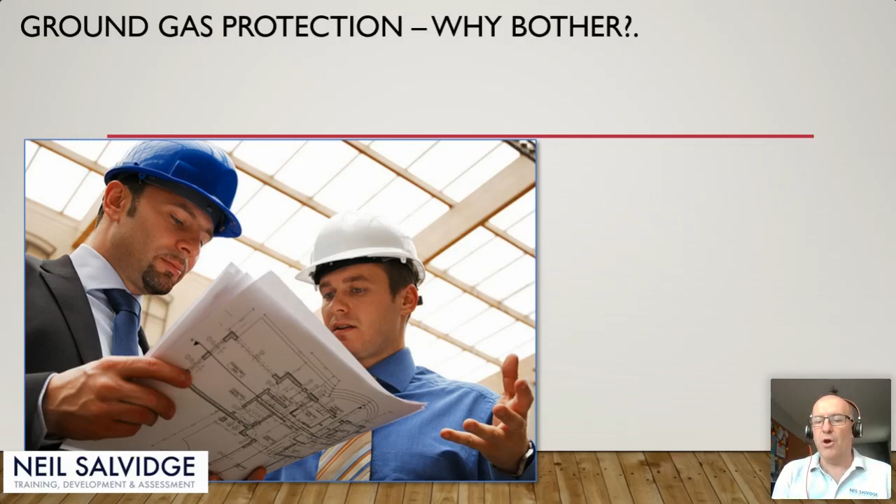And often you find the construction team you're dealing with on site, and as a technician I would meet these people, it's kind of been passed on that they've got to make it fit into the program and they've got to fit into the costs. So we tend to find ourselves meeting QSs, site managers, who are very kind of, oh, what's the problem? They're thinking about the money. They're thinking about the timings.

How long is it going to take me? And often, unfortunately, it gets passed on to other trades. I've put here brickies, sorry, bricklayers, but we do find that they're putting DPMs in the ground, and it nicely fits into the time frame when they're on site that they can deliver that part of the package.

And often it's done with very little diligence about the ground gas element. So they will be looking at it and going, oh, well, we can put that in, not a problem. We just chuck it in as we would a DPM, not understanding the full consequences of whether that DPM that is a gas protection system works or not.

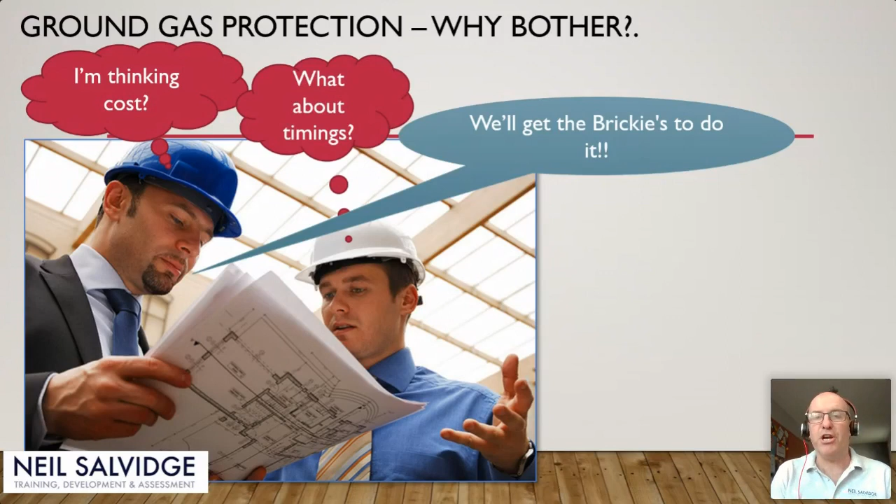So they're quite critical things that I find happen on site, and even to this day, as I say, I'm still answering that question when I meet people on site, and it's a little bit worrying still. So sharing that knowledge, please. There's a lot of information out there. We need to get it to people.

So if we look at the very early history, gases, ground gases, well, they're everywhere. When our Earth evolved 4.5 billion years ago, roughly, I wasn't around, but the scientists knew it was from various gases and explosions and all the science. I'm not a scientist, but we are surrounded by gas today. Nitrogen, oxygen, a big component of our atmosphere.

And when we're working away, we naturally take these for granted. But these gases also accumulate, and they are generated from within the Earth. So ground gases do develop with certain concentrations in oxygen. You'll find that increased oxygen or decreased oxygen can have an adverse effect on us as humans. We are very reliant on having roughly about 20-21% oxygen in our atmosphere.

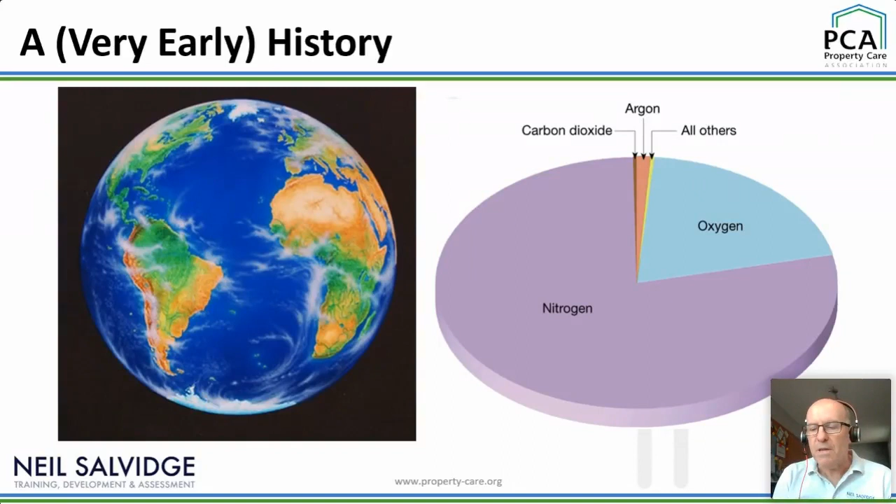Without that, we lose our ability to work effectively, or if it increases, we can enrich flammability. We all know producing a fire needs oxygen. So that's one hazard that we do encounter. As you can see, carbon dioxide's in there as well. It's generated naturally from the processes in the ground, from anaerobic or composting, digestion of soils, leaf matter, etc. So that's been going on a long time.

We can't stop it. So more recently, the history we knew about, and I often get asked this on site, don't you guys turn up with a canary to check what the air quality is doing? Well, no, but thanks to our forefathers who did go down the mines, because this is where a lot of this early development occurred. They used to take a canary, and they knew when the ground gases reached a certain level and they were harmful, the poor old canary would suffer.

How they discovered this, I don't know. It's like who ate the first egg, you know. But they knew that taking the canary, fortunately that's evolved, and it went on to things like having a Davy lamp to detect those different ground gases. And it's the oxidization of the coal that they were digging out that would generate these various hazardous environments for them. So there'd be methane generation down there.

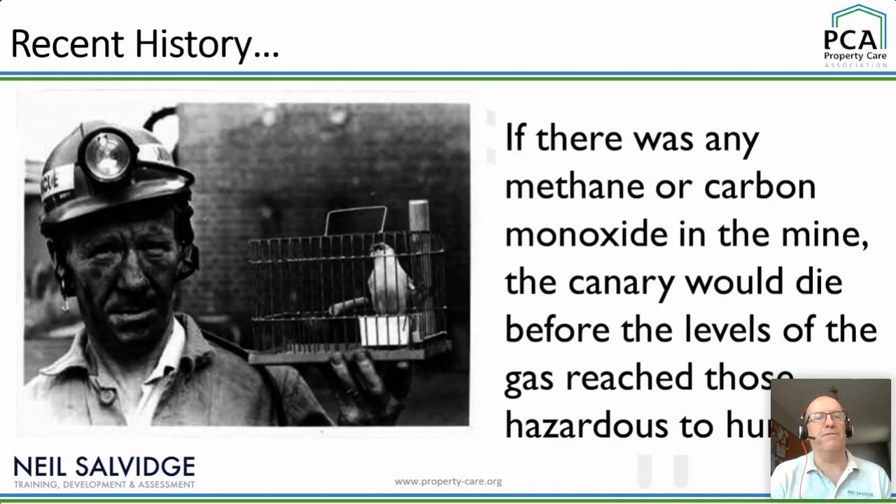If you speak to any miners, and there was a colleague assessor who was involved in the mining sector who told me some real horror stories of things that had happened with ground gases and explosions. So a lot was learned from our ancestors on this side of things. So that's a little bit of recent history.

Some of you might be familiar with the Abbeystead incident that happened in 1984. It's noted in our industry as one of the earliest significant events. Sadly, 16 people were killed in this incident at a pumping station built by the local water authority to divert floodwaters from one valley to the other side. And while they were constructing the tunnel, they went through a strata where there was natural gas occurring. It was a coal seam, shale gas that they were drilling through.

All working well when there was water. Nobody was down there. It wasn't really an occupied building. It was just a pumping plant facility. But then they took local residents on a tour, and unfortunately they drained the tunnel, and during that, gas had migrated into the void that was left by the water.

So during the course of the visit, something ignited the gases that built up in there, and they believe it was a methane explosion. Back in those days, people used to smoke in a lot of unusual places. I've heard one rumor that it was potentially somebody lighting a cigarette. So really not a very nice situation.

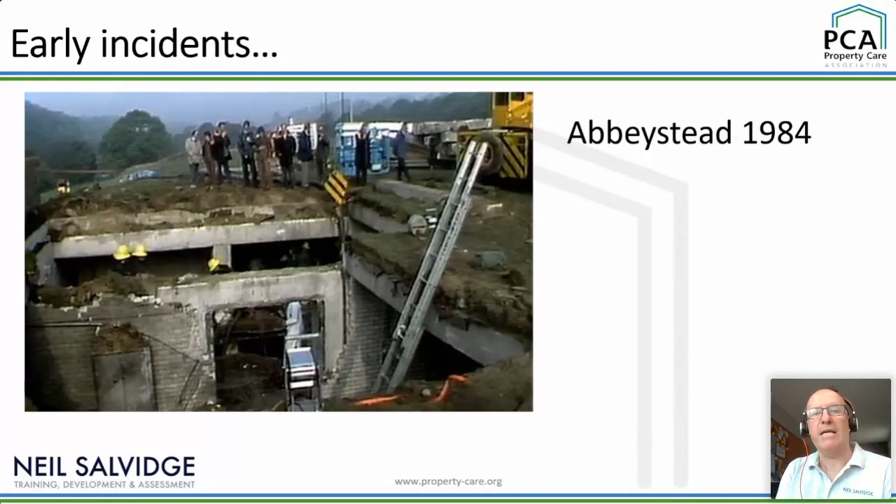And it certainly set a mark in our history of ground gas. 2 years later, Loscoe in Derbyshire was another significant event. Slightly different in this format, in that it was migrating ground gas from a neighbouring landfill site that permeated through the strata and got into this property. This is Clarke Avenue. And at 6 o'clock in the morning, there was a source of ignition that allowed that ground gas that had accumulated in the property to cause the destruction that you can see on the screen now.

This, again, 2 years apart from the earlier Abbeystead incident. So people really did start picking their ears up here and thinking, we need to look at this. The first investigations were really carried out on this, and there was some good guidance and initial findings from CIRIA documents that were worked on following these incidents. So again, fortunately in this incident, only 3 people were injured, no fatalities in this one, but it certainly made people have a look and think.

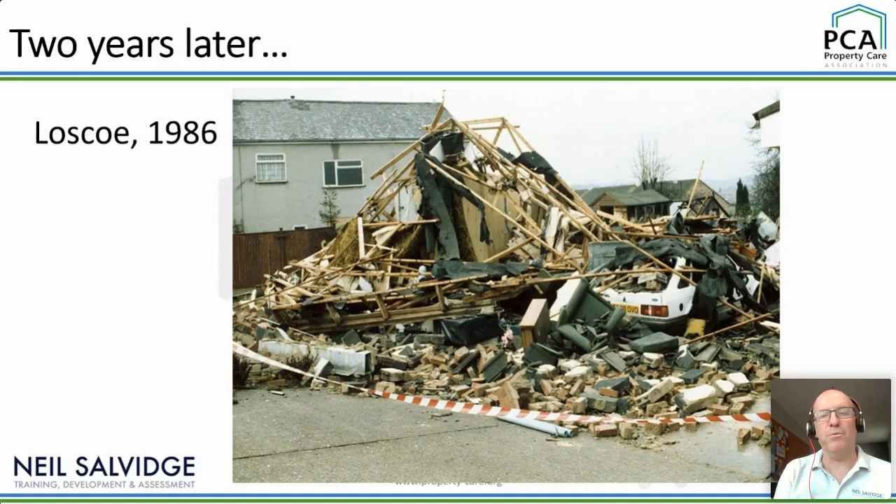So that started our early forms of guidance. The BRE, Building Research Establishment, put their first reports together, and BRE 212. These would be familiar documents to those already working in the industry, but these were the founding documents that set the scene. The government then also took a lead on this element as well, and Approved Document C, which sits in our building regulations, was first published in 1991. Again, still in existence today. There's been numerous revisions and amendments. 2012, I believe, was the most recent.

This side of the industry is where our site investigation, our planners, all the people at that front end are really looking at this stuff. But it's very valuable just to know that they exist, because document C, some of you will be familiar with other approved documents, A, B, C, D, E, F, and so on. Ventilation, document F is quite a key one that a lot of people work on as well in this sector. Just a little point of fact, it mentions Japanese knotweed, and I know the PCA have a knotweed involvement, but Approved Document C has it as a contaminant in the ground. So this is really investigating those contaminants in the ground, so that you're aware of what you're dealing with before you proceed into your planning phase and progress the building.

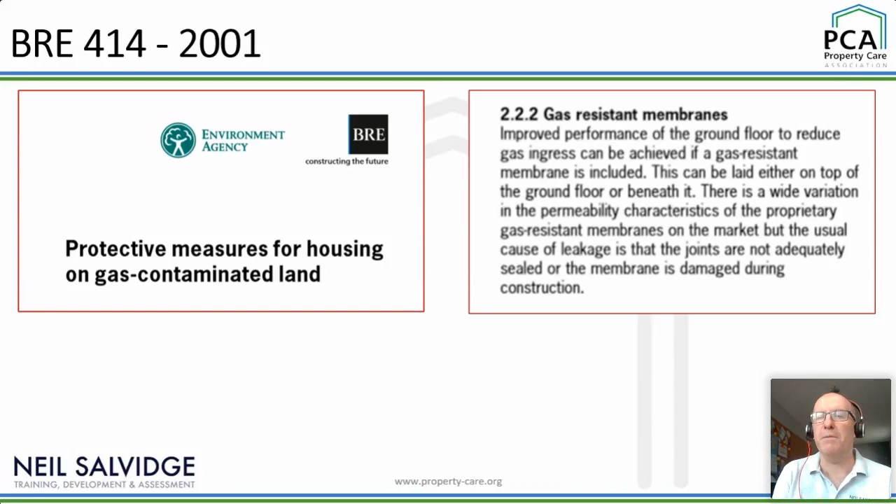A document that I refer to occasionally is the BRE 414 document, 2001. It gives the first kind of comments on using gas-resistant membranes. And you can see in there, comment 2.2.2, the gas-resistant membranes are mentioned, and they're used throughout this document. For those that look at it, it's kind of useful. A little bit dated now, to be honest, and it could do with a bit of a tweak, because a lot of the building methods there are very flat.

Hopefully you'll be able to see my cursor. Is the cursor coming up on this, Andy? Can you see it? Is that holding up? Yes, I can see your cursor.

Good. So when the BRE wrote this initial document, everything is on a very flat plane. Every drawing shows the membrane flat all the time. And some of you that are familiar with putting in gas membranes will often find that there's a step detail or a formation at the perimeter to make up that upstand. None of the drawings in here really detail that.

The other thing that is mentioned is the slab with a geocomposite drainage blanket. That is a little bit of a worry, because it's a very similar product to those used in drainage systems in our structural waterproofing, on the cavity drainage systems. But if it's incorrectly installed or put in the wrong way round, it's not effective in ventilation for gas protection. And that's a common occurrence that we do see in this sector, where the membranes or the composite venting layers are not installed correctly. So it needs a little bit of a tweak and an update, I think, but it's still current. That document is still used to this day. So BRE 414.

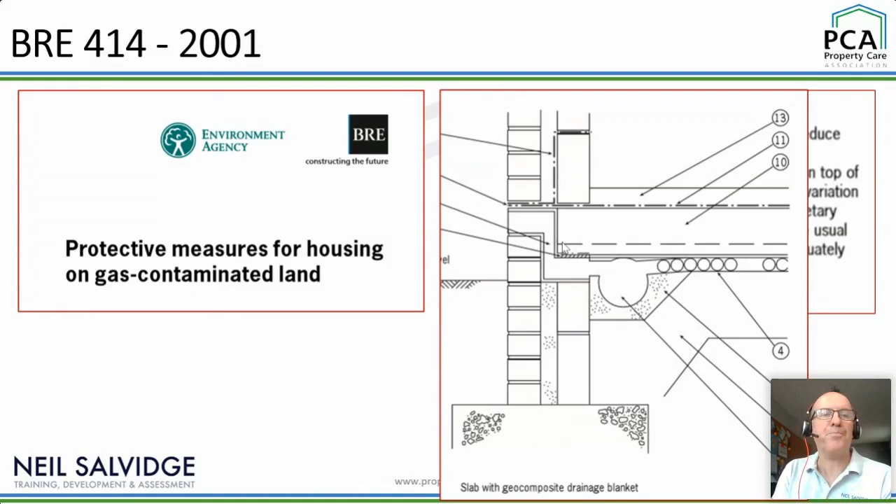When I'm dealing with my NVQ learners and doing support with those, remember, I don't train them on how to do it, but we look at the different elements of ground gas protection. One of their requirements is to understand the differences. So I say here, are all the gases the same? Well, no, they're very different. They all move, behave, they're built differently.

So looking at the methane, water, well, water a gas? You know, you can find it in different states. You can get it in a vapor, in a solid, and in a liquid state. So when you boil water, it becomes vapor. It's in a gas, yeah? But also understanding if it's toxic, if it's an asphyxiant, if it generates an explosive atmosphere.

So that one, a lot of my learners will say, surely that should be like a blast and an explosion. Well, that's an explosive, you know, the explosive product, like a bomb or something. But generating explosive atmospheres is something that's quite serious in this sector, being aware of it. And this is a rather unusual one at the end, which is the VOCs, having awareness of volatile organic compounds.

I listened in on James's webinar a couple of weeks ago now, where they were talking about the evolution of damp proofing and the DPCs, and it was mentioned in that with the VOCs, and I will touch on that a little bit later on with some of the membrane products about how effective they are against VOCs.

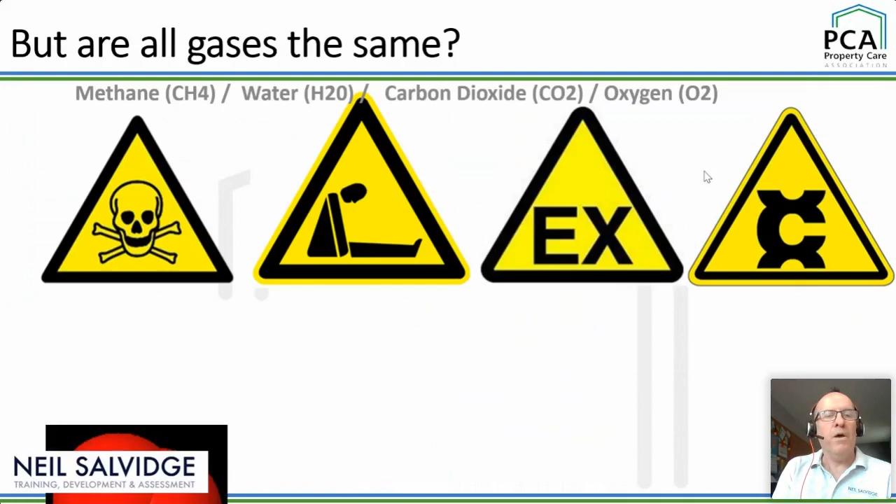So we also look at the structure. Again, I'm not a scientist, but if you look at the way they're built, the way they're formed, we can see there, the very small one we've put in there is methane, very small molecule. And often when you talk to people that are putting a barrier, gas protection in, they say, well, if it keeps water out, it's going to keep the gas out. Well, no, that's not true, because the structure of a methane molecule is far, far smaller than a molecule of water, and it will get through.

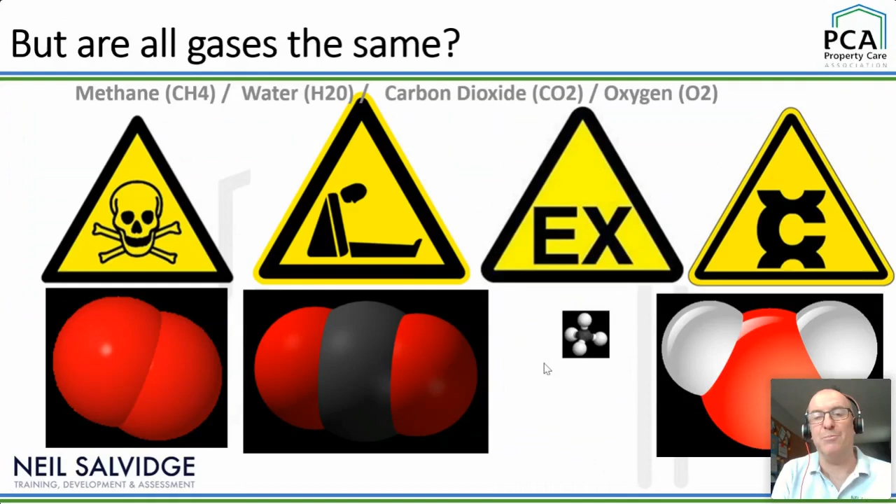They behave very differently. Gases have a different route to get into buildings. They don't work whether you can pressurize them, but normally they will flow in various formats. They're driven by pressure in the atmosphere. They're driven by water in the ground, or a flooding or tidal influence. So all these things have quite a major part to play in how they work or how they affect the building.

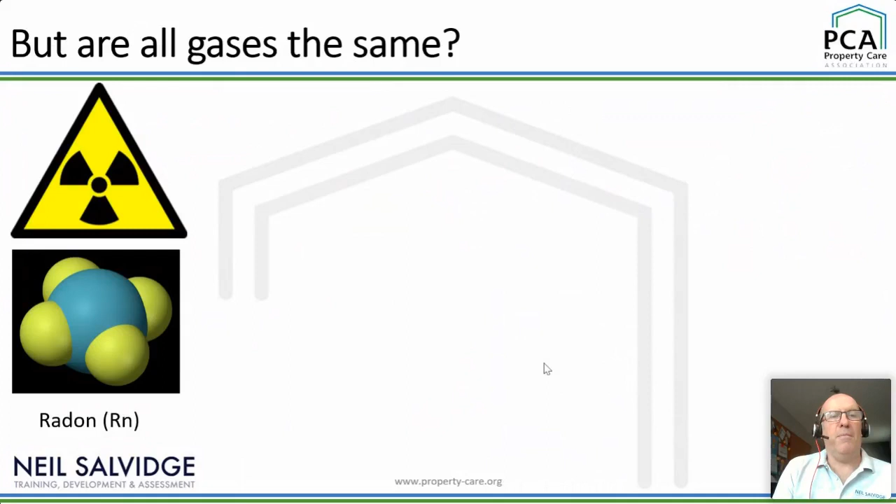And then we have the uninvited guest at the table, which is always the radon side of things. A lot of people will talk about radon. I've been to some of the most unusual places where you'd expect to find radon. And I'm going to put up a radon map of England here. And I've been working up in Norfolk, and they're putting gas barriers in for obviously other reasons, not looking at the site investigation, and then telling me, oh, we're putting a radon barrier in. Everything becomes a generic radon barrier.

Whereas if you speak to people down in Cornwall, the southwest, where you can see the darker tiles here, that indicates that there's higher or more noted concentrations or affected properties with radon there. So the radon map is available for the UK. And Andy, not to leave our friends north of the border out, there's one for Scotland as well. We can see there the Granite City, Aberdeen, and we can see radon is very associated with the fractured granites in the ground, and that's permeating through the strata.

And often it's very difficult, well, you can't really detect it in borehole sampling, for example, but often it's knowing that it's present in the environment where you're working, and that you will be able to design systems in and incorporate that so that should the radon be there, you can do something about it rather than have to take extreme measures later on when it's too late.

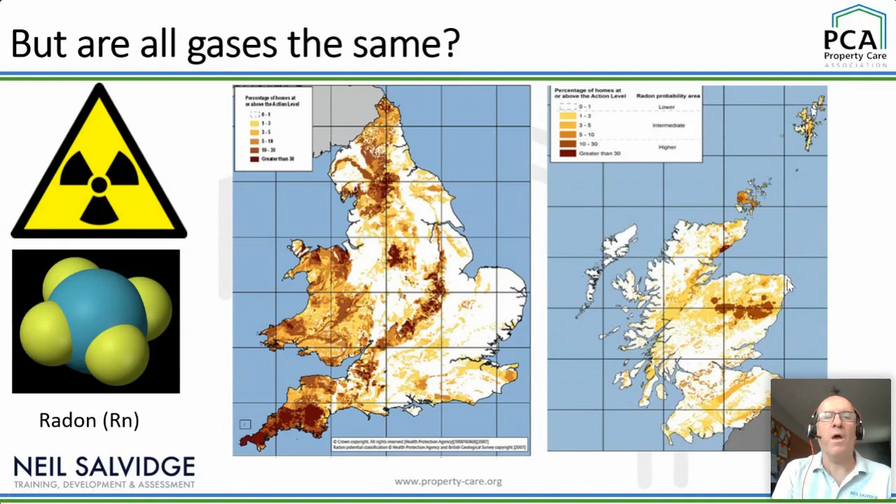Yeah, so just got what we call a conceptual site model here. Looking at this is a requirement under British Standard 8485 when you're designing your systems, that you consider the three elements that we've got there. We've got the source in the blue, pathways in the red, and receptors in the green. So the source, we've got waste, and we've got peaty soils down in the bottom by the stream. Pathways is your geology, and then we have the receptors, which is the actual buildings here.

You know, that's all the people. We've got various receptors, people outside, even the vegetation, that's a potential receptor. So hopefully when people are doing the site investigation, your consultants will be looking at some forms of remediation strategies where they might adopt cut-off barriers to try and segregate the contaminants. They might look at soil remediation methods where they dig and dump, or they dig and inject, or they aerate the soils. These are all various methods that are used. Or they might use a capping layer.

Now, the capping layer was used at Loscoe, and that was one of the driving mechanisms which came off the back of conceptual site models that caused the ground gases to migrate the way they did, plus the atmospheric pressure was a driving force as well. So the weather outside, there was a particularly low pressure weather event that caused the gases to change the way they traveled. So in that instance, they are remediation strategies that might be used.

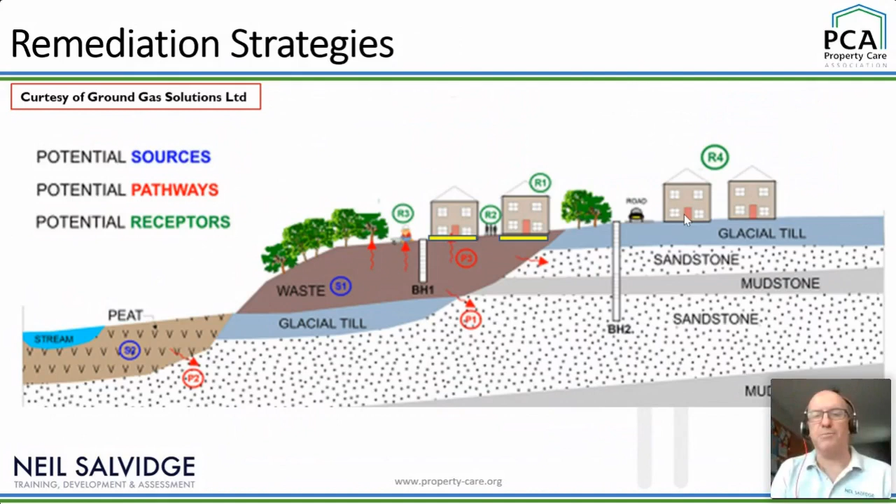But often what we find is some of them aren't adopted, and they just go straight in with a membrane to the building. And I've seen it on numerous occasions where the membranes have gone in, and you'll find that two plots, as we can see here, have got gas membranes, and maybe 20 meters up the road, they've not got membranes. It's quite common where people zone the sites into various risk factors. So that's all something that I see on a regular basis, especially on these big multi-housing developments, big estates being built.

So, but then we get the situation where old meets new. And in this particular instance, I come across a lot of what we call retrofit buildings where the old property's been there hundreds of years, never been monitored for ground gas. Whether it's got it or not is another thing. But often they were designed and built with good ventilation in the underfloor voids, good air bricks, mainly for the timber floors. But that's a good method of, if there was any contaminants, they get diluted and then pushed out through the airflow.

And you'll find that the homeowner will then want to build their new house or their new extension, like we can see here, this very snazzy looking annex to the property. And suddenly they've got to jump through all the hoops for ground gas protection. They've got to put membranes in. They've got to do this, this, and this. Yet the rest of the house hasn't got anything on it. So this could also change the dynamic by putting a building next to an existing building where you're putting all belt and braces gas protection in, but next door has got nothing. So it could increase the potential hazard to that property.

Yeah. CIRIA are currently writing and working on a document relating to retrofit measures in these scenarios. British Standard 8485 is for new builds, doesn't really cover existing structures, but some planners will adopt 8485 on a new build on an existing structure. So it's interpretation from the local authority, how they deal with it and how the designer works with it.

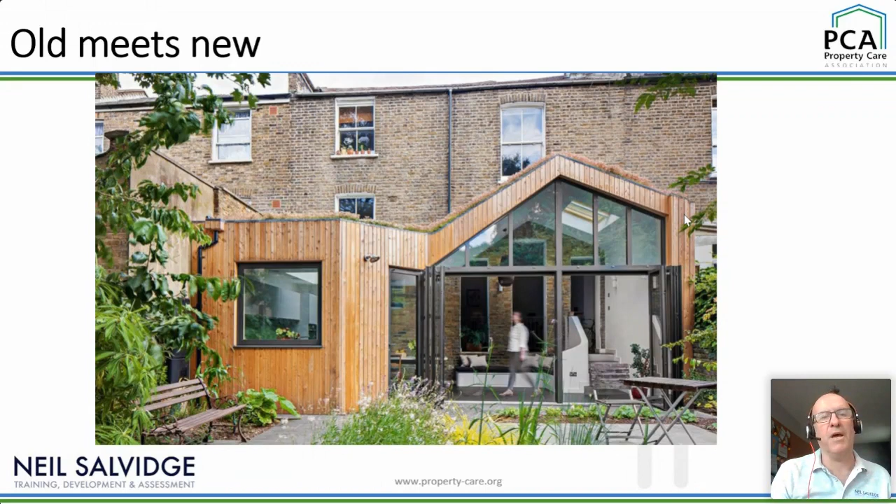Okay. So, Andy, this is where I'm going to ask for your help now, mate. The poll. No worries. Well, do you want to throw out the question then to everyone?

Well, I'm going to look at some of the installation standards now, and we have an NVQ in existence. There isn't an SVQ for Scotland. Everybody operates under the NVQ. So NVQ or not to NVQ? That is the question. Do you think we should be following the NVQ process for our installers to be qualified? Or do you think it doesn't really matter?

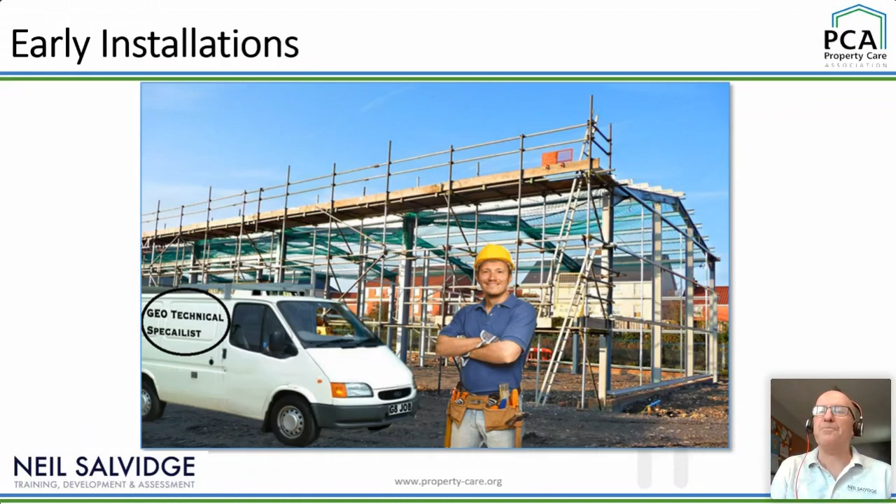So let's again look at the early stage of installation of gas membranes, and this is where I started out. Back in the mid-90s, it was particularly a guy in a white van, trade background of some description, who would often offer to put the gas membranes in. It was unregulated back then, so anybody put it in, and there were various standards. We know that there were some very good and some very poor. So hopefully over the next couple of slides, we'll look at some of those various standards that existed.

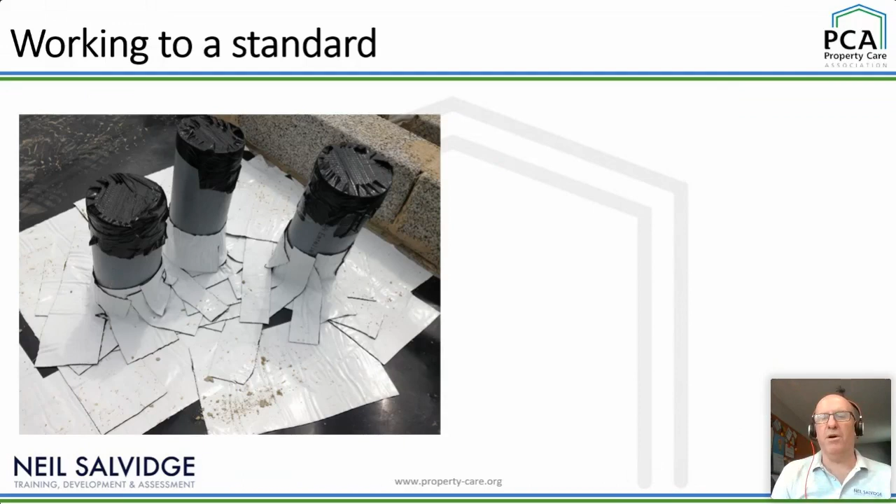Those that have been on presentations with me would have seen this picture before. Looks like we've got some self-adhesive here catapulted on from about 20 miles away. Working to a standard is critical in this industry. If I said to the technician that had done that, can you go and repeat that again and again and again? They'd never be able to do it. So having a standard method of work is quite a key thing.

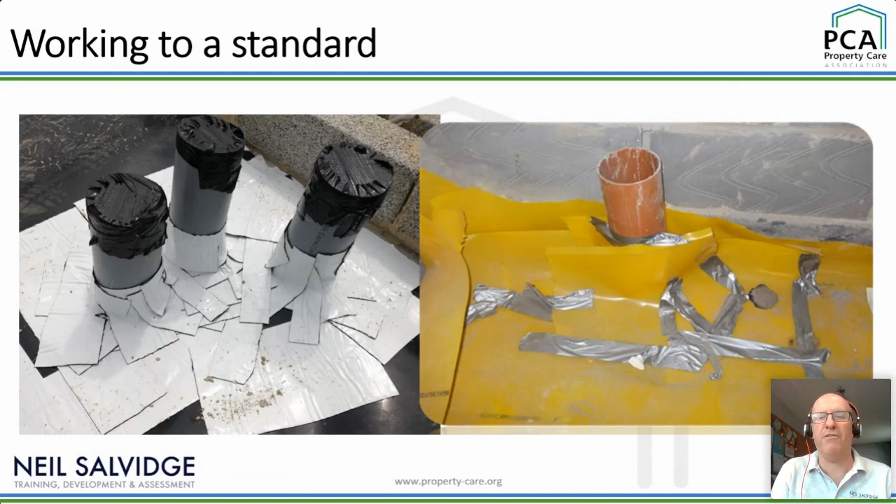Also, when you give the product, and I'm not going to name any occupations here, this was obviously given to somebody, a roll of self-adhesive tape or a variant, it looks like duct tape to me, but that was the effort, and that is a genuine picture. That was taken by a verifier looking at a job, who was expected to sign that off. So the technician had no knowledge of what was required, what the expectations were. So having that in advance is a real leap forward.

So in the development of our NVQ process, a little history of it, in 2008, 2009 it was developed, and we launched the NVQ in 2010. So a couple of years with the industry putting it together. And if you've got insomnia one night, please visit the National Occupational Standards website, where you can view VR 612 and 613, and you will see the standards required. Those in the waterproofing sector would have been familiar with VR 762, 492, and 491. Very, very similar to the gas protection in their scope.

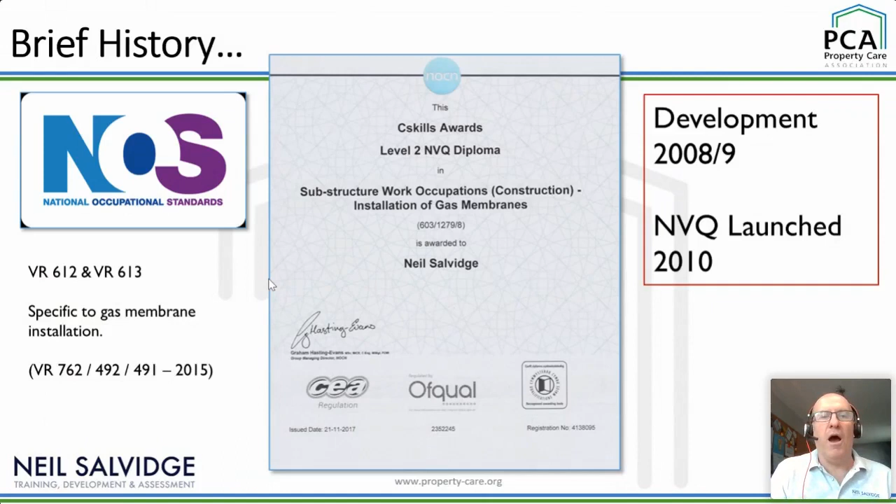So they're the learning outcomes that we expect the learners to be able to achieve on a consistent basis to prove their competencies. And ultimately, at the end of the day, you're going to get a nice certificate for doing that. But that also evolved into the good old CSCS cards to demonstrate those competencies. Here we can see that the green general construction site operative card is commonly used.

And do site managers really check these out? No. I think they just want to tick the box, so they've got something in their health and safety folder to see that you've done a health and safety and environment test. That's it. Not competencies to your specific trade. I hear of more coming through now where people are denied access to site because they don't have a blue card. So demonstrating you're a skilled worker, which is your NVQ2, is becoming more prominent now. People are asking for that NVQ level 2 qualification. You can see a copy of it.

And one good thing that we're seeing as well is the NVQ3, which isn't gas membrane installation, but it's supervisory, because some people are reading the CIRIA guidance where it says NVQ2 for gas membranes is a supervisory role. Well, no, it's not. NVQ2 is not a supervisory role. NVQ3 is a supervisory role. So people are stepping up to the plate now to do their level 3 as well in supervising those particular works, which is all good.

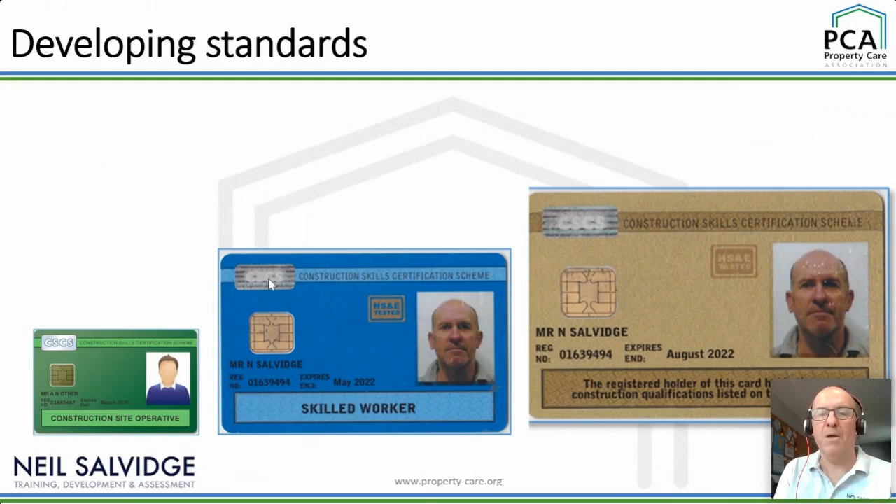And again, the chip system on the card, how many cards have you had read in your history? That blue card you're looking at there has been read twice in its entire lifetime. Not very good.

There's national training standards that are put together by CITB in this sector as well, to look at those, to consider that, because that is going to set you up so that when you do go for your driving test, the assessor isn't going to keep throwing things back at you and saying, well, you need to go back and revise and consider this again. And I'm very active in that. So hopefully, there's support out there. So using it before going into this.

I actually had a screeder ring me up yesterday, tell me he was on a job. He needs it validated. He needs his NVQs by Friday. Ain't going to happen. Sorry. One disappointed person there.

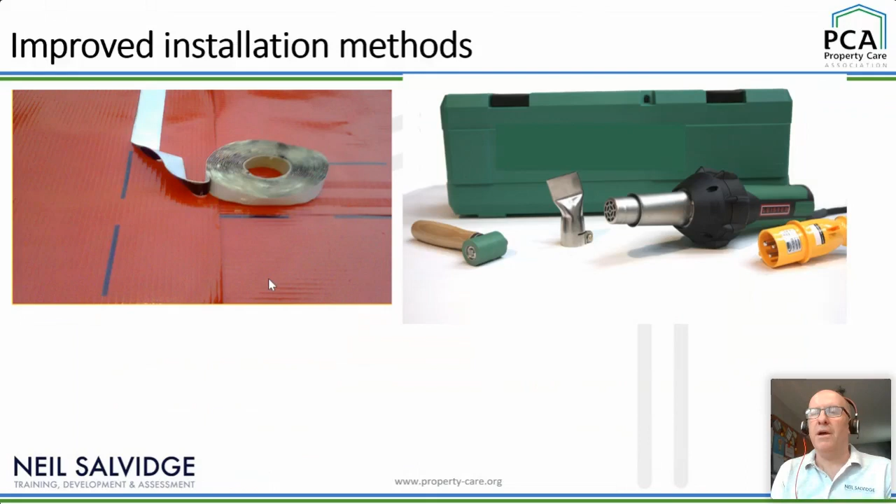So these are learning criteria that we expect as assessors, that they should be able to demonstrate that and talk us through it and give us a good insight into their operational methods. And we also look at the more industrial welding processes, so using machine welding as well. It's quite a key part of giving somebody a massive warehouse of 10,000 square meters of installation to do. To sit on their hands and knees with a hand welder is going to be quite time consuming and also not very good for the health and well-being of that technician.

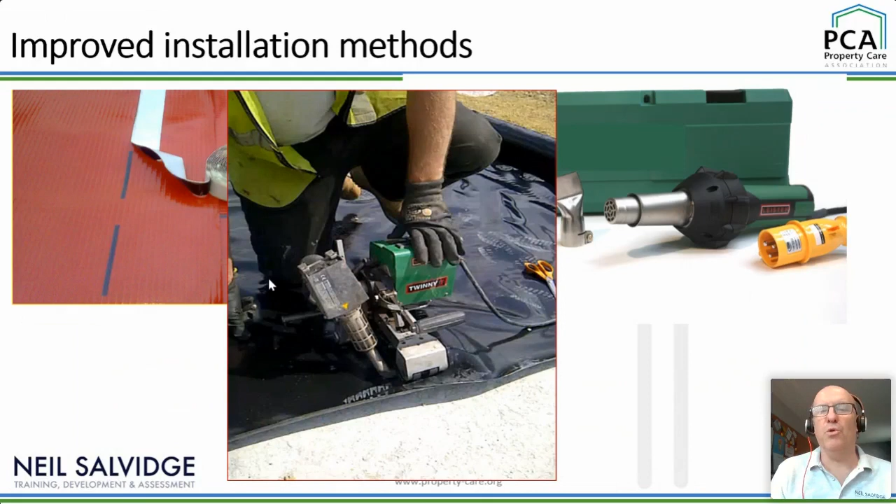But understanding, again, welding methods that are out there and can be applied, it's one of the performance criteria we expect. And again, in some of the VOC environments, welding is the only recognized method of dealing with that, where tapes are still in dispute whether they are acceptable or not. So again, speaking to your manufacturers on that side of things is quite a key element, and they will guide you on what products they can do.

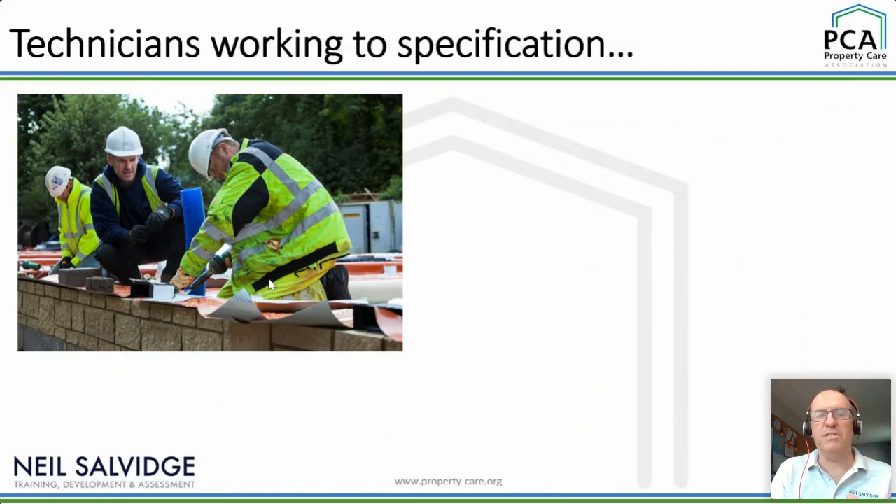So again, technicians, it's nice to get together with them, talk through working with drawings, working to a detail. They must understand that. And also understanding all the technicalities of different things they're going to encounter. For example, here we've got some steel stanchions with a base plate, a few pipe ducts, and we've got pipe entries and an acoustic robust detail. So sometimes I mention this in my pre-applications to learners. Have you ever done acoustic robust detail? No, never heard of that.

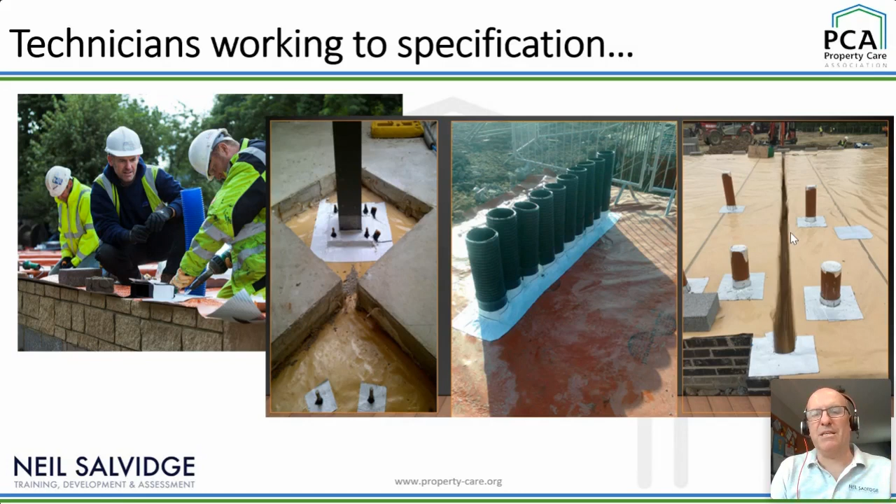Okay. We need to find out what these details are, because when you encounter them on site, and we haven't got a vast number of details, they should be able to look at it, understand, and know how they're going to approach doing that detailing. In this particular example, the technician that did this actually did it in a reverse preformed system out of the hole and then located it in. So seeing good working methods is really good, to see how a technician will adapt their skills to overcome that.

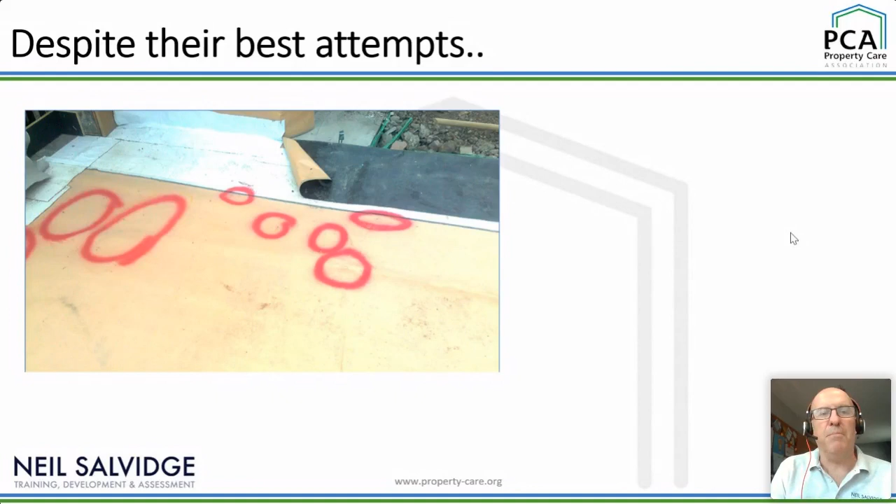But despite their best attempts, our good old follow-on trade is our worst enemy out there. They give us many problems, and as you can see here, somebody's identified some puncture damage in the membranes. Unfortunately, they've actually done more damage by marking it with a solvent spray marker on the membrane. That's quite detrimental and causing more problems. And to really rub salt in the wounds, you let your steel fixers come on afterwards and basically saw through the ends of their sheets and straight through the membrane as well.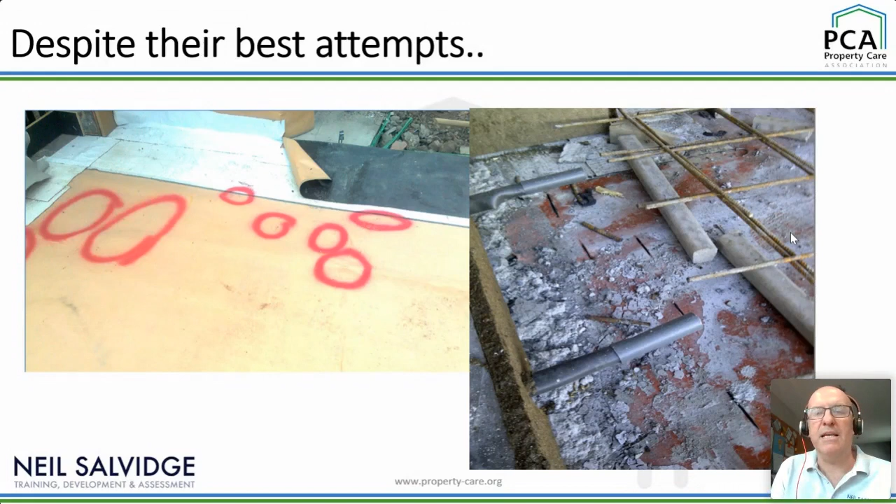It's an ongoing battle, and I'm sure a lot of you are sitting there going, yes, I've seen that, and it's education that has to go on out there. That job cost a lot of time and money to put right in the end. There was nearly 400 linear meters of damage like that, which actually took 3 days to repair and nearly £4,500 in cost, plus a delayed concrete pour. So QSs don't like that. And then if you see situations like this, it's game over really.

Driving on reinforcing on the membrane, that's really, you know, I see pictures come up on LinkedIn of all these snazzy installation jobs, but then I look at it thinking, how are you going to get the concrete over there? You can see that a concrete wagon's going to be driving straight over a membrane. Whoever validated that, well, I don't know how they validated it, but no thought went into the sequence, the process, and how to get that membrane safely in and fit for purpose.

They'd be best off actually leaving it out. Yeah, it would have saved money anyway.

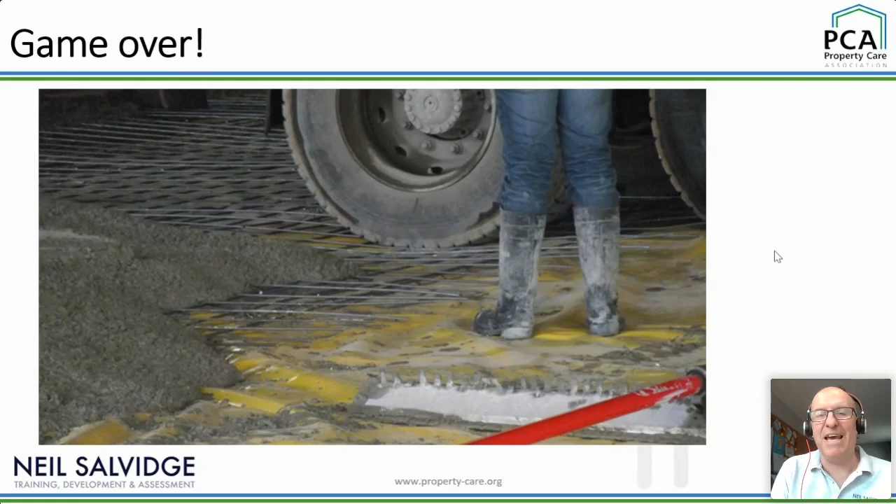Yeah. So the other thing is, people look at the designs of the gas protection systems, and here we can see this is a traditional bit of containment/landfill lining, where they're using very heavy gauge HDPE membranes. So these could be 1.5, 2 mil thick, very rigid, hard to turn membranes. Great in the environment that you can see there, but the minute you try and put them in houses, and I have encountered this where people are trying to lift a 2-ton roll into a house or cut it down into sections and form corners, it's just not achievable. The membranes aren't appropriate.

So I've put a little chart there with turning. HDPE membranes are notorious for stress fracturing when you turn them over a certain angle. A lot of the turns that we use in gas protection are 90 degrees. That would basically put a crack all the way through that membrane at that junction. Yeah.

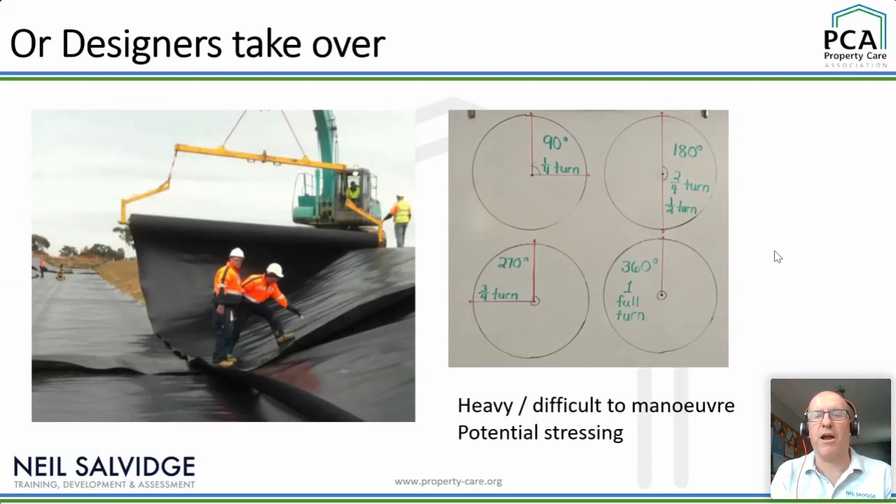And the other one was looking at the VOCs, having appropriate membranes that can survive VOC impact. Predominantly it's the vapors of the VOCs that are the element we face. You can get VOCs in a liquid phase as well, but predominantly ground might be detected as having a VOC contaminant in it. Certainly in the retrofit environment with oil spills, it commonly happens where membranes are put in as a last measure to protect the property from any residual vapors there. But also new builds might have a site investigation report that's detected that VOCs are present in the ground.

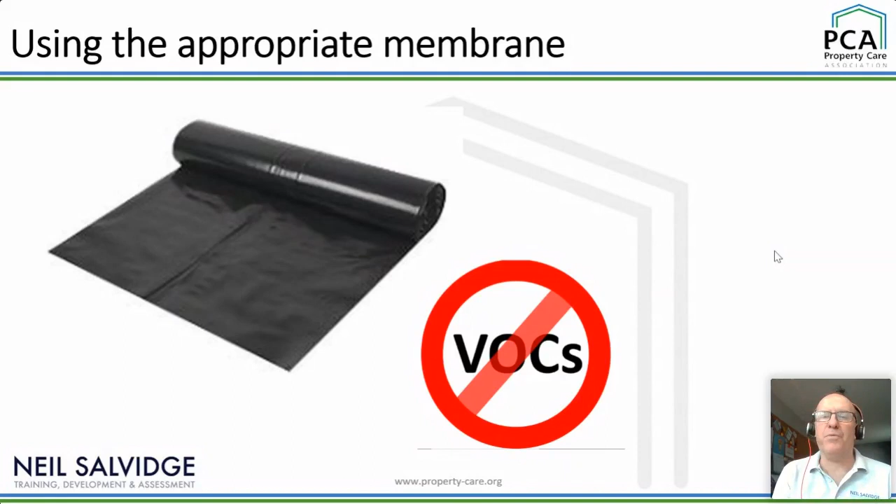So again, CIRIA wrote some guidance on that, C748, which is the guidance on VOC membranes with VOC vapors. So that is an element to really research and look at if you're going into that environment where your site investigation has identified VOCs, volatile organic compounds, in the ground. And like with our damp proofing that James mentioned in his previous seminar, it could be a consideration there that crosses over into that sector as well.

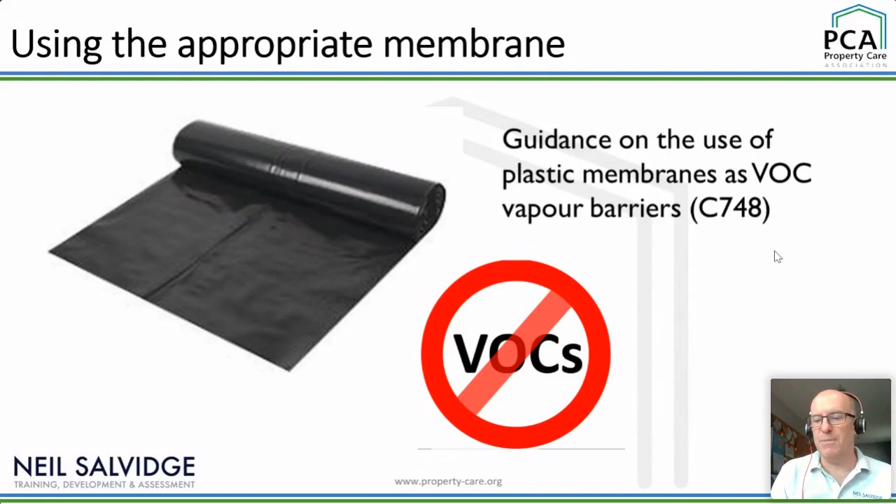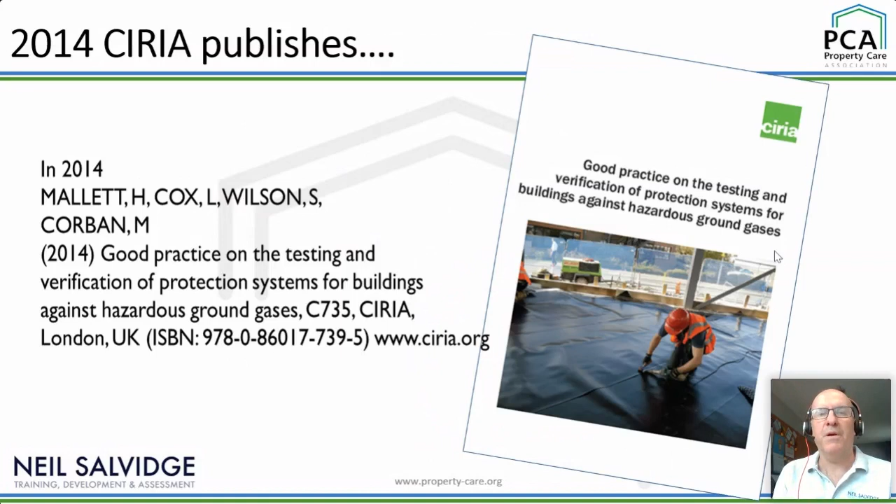So 2014, this was a real game changer when C735 was published. I have to give credit there to the authors who wrote that guidance, and it's still active today. It's a popular document. It works hand in hand with other documents that are out there. So C735 is your verification document. And that ultimately closes this circle: we investigate the site, we risk assess the site, design it, install it, and verify it. So the top box here is our verification, which should shut the circle.

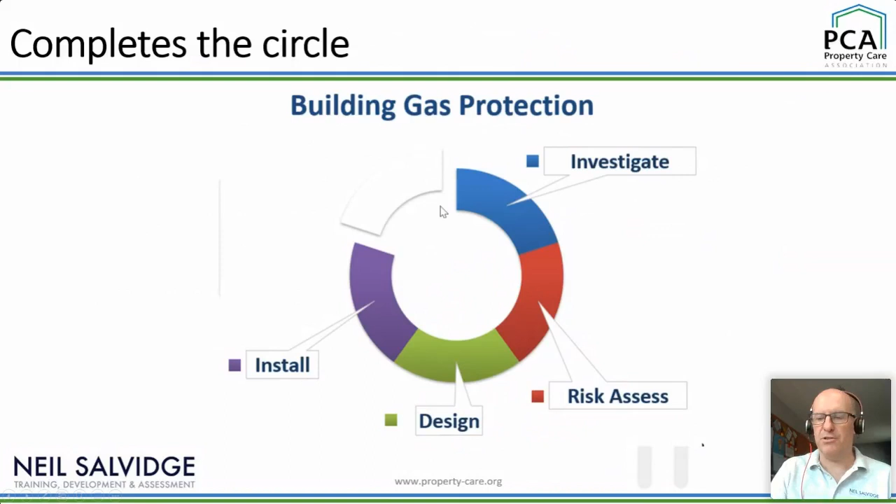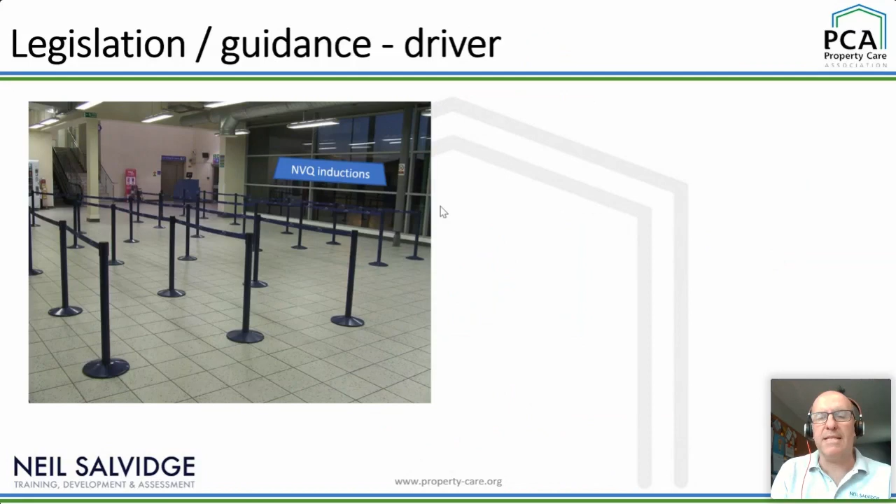So that guidance document from CIRIA actually changed the tide. In 2014, my queue for NVQ inductions was like this. And I think most airports in the UK are like that at the moment as well. But there was nobody waiting. You didn't need to do it. We don't need the NVQ, it doesn't matter. When that guidance landed in 2014, I suddenly had a queue going around the corner. Now, it wasn't quite as severe as that, but there was a lot of people.

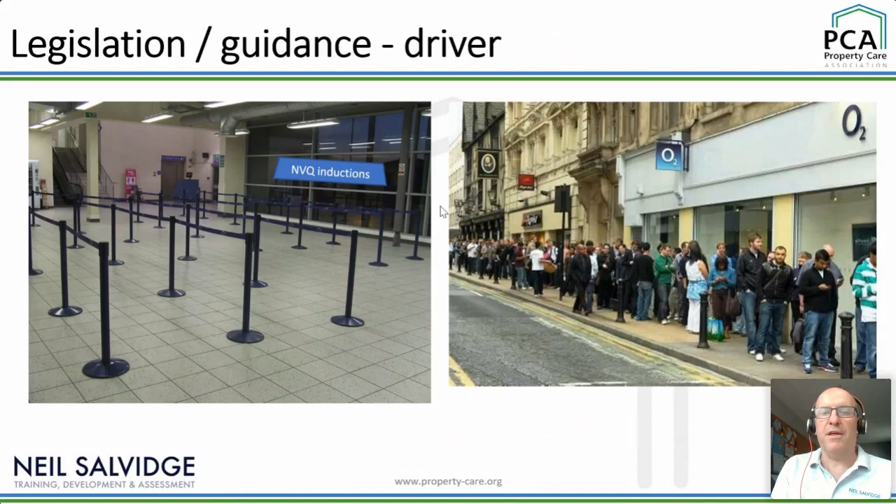Suddenly my phone was ringing. I need to get an NVQ. I've been doing this for years. We're good technicians. Excellent. But doing the NVQ, we need to do that process. So that was a real changing thing that happened. It forced the hand of our industry. So when we go back to the NVQ question, 83% of you say yes, we do need the NVQ. 6 say no. Okay, well, that is valid.

Because the next slide I take you on to is that when CIRIA wrote 735, the group put together, and I've heard a brilliant term for this, the green target zone as the donut of doom, where people make the consideration on the risk. So it's a risk-based approach to the gas regime we can see here, the complexity of the design. So that's back to the turning, the verticals, horizontals, all those little funny details, acoustic robust details, for example. Then we look at the installation workforce, and it clearly states we've got 2 competencies there, non-specialist and skilled.

So with those, there was a dividing line of skilled and non-skilled. Now, some of the lower risk jobs might actually be very suitable for a non-skilled workforce if it's a very simple design, low risk site, but you might have a workforce whose skills will adapt and they will be able to do the work. Whereas you might have a high risk site in the red zone, very complicated design. You don't want to be putting that into the hands of the non-skilled.

And again, this falls into place where VOCs are present, verifiers will call in 100% verification in those environments. You really need to consider if you're not going to be able to pass a verification plan by putting a ground worker on a high risk site with a complex design. It's just not going to happen, and your verifier will call the shots on this. So with British Standard 8485, there were some changes in the recent revision last year, but table 7 still nominates 2 points for a validated membrane. So that sits on that table 7 for you.

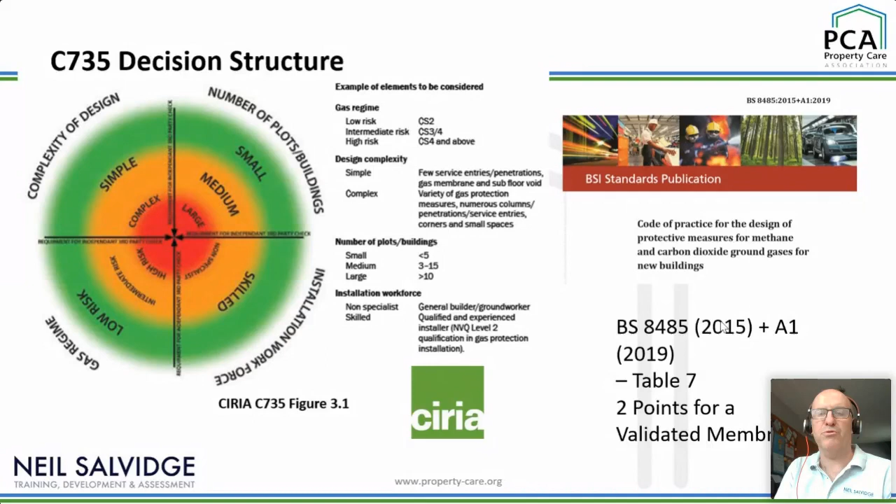I put the picture up of Gorebridge. I think we all know what happened there. Well, that was the way Gorebridge was. 2014, this incident. Carbon dioxide asphyxiated a group of youngsters, caused a problem. You can see the property there at the front that's been boarded up. A couple of years later, it's all gone. The local authorities made the decision to demolish the whole site. 64 houses were demolished there. I've heard numerous stories that people were killed in there. Well, as far as I'm aware, there were no fatalities in that particular instance. People were hospitalized, but no fatalities.

But when you look at that circle of the gas protection, the NHS Lothian report clearly identifies that the problems came around in this early investigate and risk assess stage, because no gas protection was designed in here, so therefore there was no installation. And when the houses were built, verification didn't exist. 735 hadn't been written at that point. So these two were kind of off the hook. But certainly that is now playing out, that people are looking at that element of ground gas protection. So that forces us back to the early phases of ground gas protection design, and sets the scene of what we've got to achieve on the installation side.

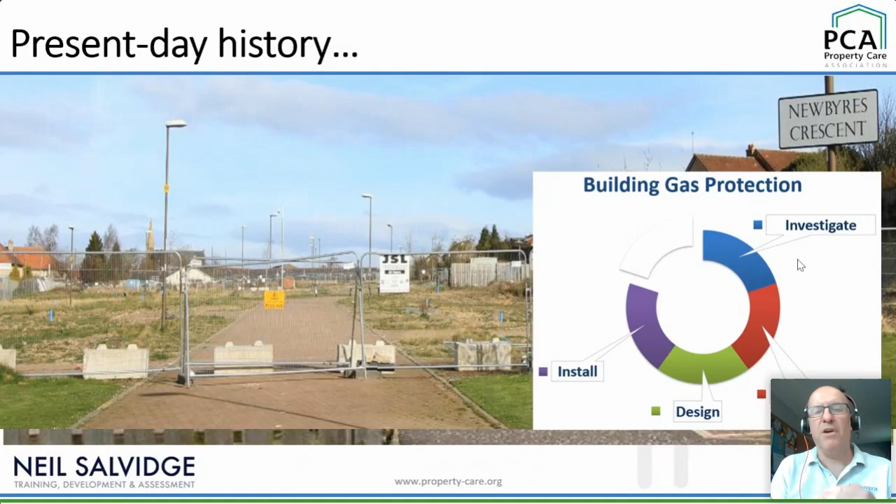So present day history, to wrap up the last few bits now, I always like to look at a few jobs that I've been involved with and worked on. And there's a classic there down in London. Driving past it or going past on the boat, it's always nice to see. Again, ExCeL, another big project. These have all got major gas protection systems on them. Some of them more complicated with ventilation and active systems blowing underneath the floors. ExCeL's got a big subfloor void under there with a car park. So working on that, we worked alongside some waterproofing guys.

And then you've got the real quirky design buildings. The architect has a vision, making the vision look really good. And then when you look at the complexity of the ground, this was in Nottingham, Triumph Road, on the former Raleigh bicycle factory. This is where they used to do the metal processing for all their tubing for the bikes, and the ground had heavy VOC contaminants in there. Plus they built a basement that was the plant room, which went about 3.5, 4 meters underground. So it looks great from the pictures, but quite a difficult project to work on. But seeing the end result still working, it's really rewarding.

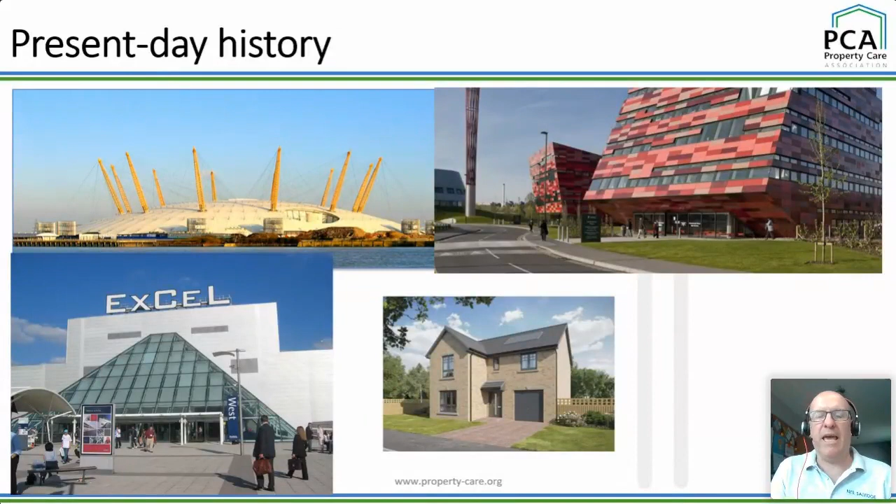And the other one that we're all working at is getting these houses up that the government have got a big target on. You'll find the brownfield first policy makes developers use ground gas protection. I often hear, "Oh, we did it on the last job, we're going to do the same on this job." There has to be a lot of due diligence done on, is the system right? Is it appropriate? Does it need to be done? Why bother? Because that is a big question in our industry as well. Is every gas protection system really necessary? Or is it just a cost that's being put in because the developer used it last time, or is being steered to use it again? So I've popped that one in there.

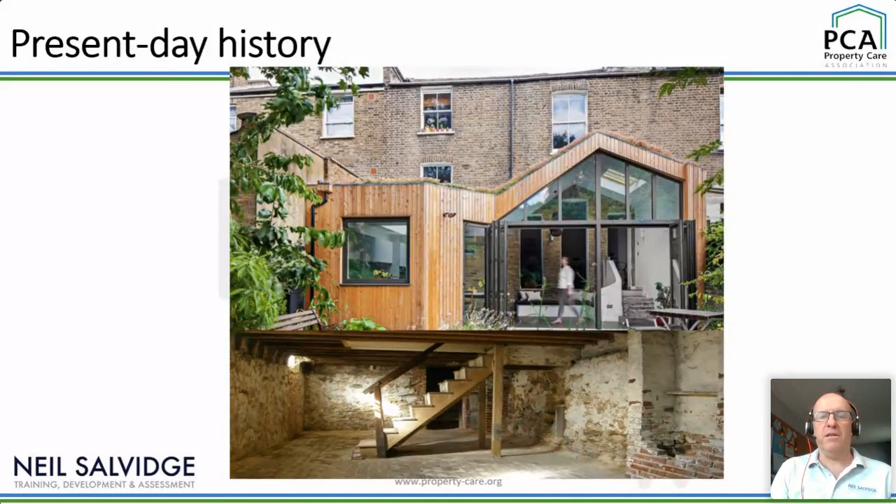And then back to our old meets new house. We can resolve the gas protection elements here with the new build, but then often in London particularly, we're getting these iceberg scenarios where they're developing under the buildings as well. So we're finding that the structural waterproofing elements are meeting ground gas as well. So British Standard 8102 is meeting British Standard 8485. There's cross elements in there where the two are having to be looked at together. And I've been involved in a couple of those.

And likewise, I've been involved with some oil spill situations where petroleum or domestic heating fuels have leaked, got into the water table, or got into the property. They've got to be resolved and dealt with before any further development and occupation of the building to protect the homeowners from any potential hazards. So these are things that are going on.

Watch out for the CIRIA guidance that's being written on that. I think there's some people sitting in today who are involved on that group. So that's going to be about the retrofitting. Where this sits, I haven't seen any drafts of it yet, but I've offered some contributions on it. So hopefully they fall into place.

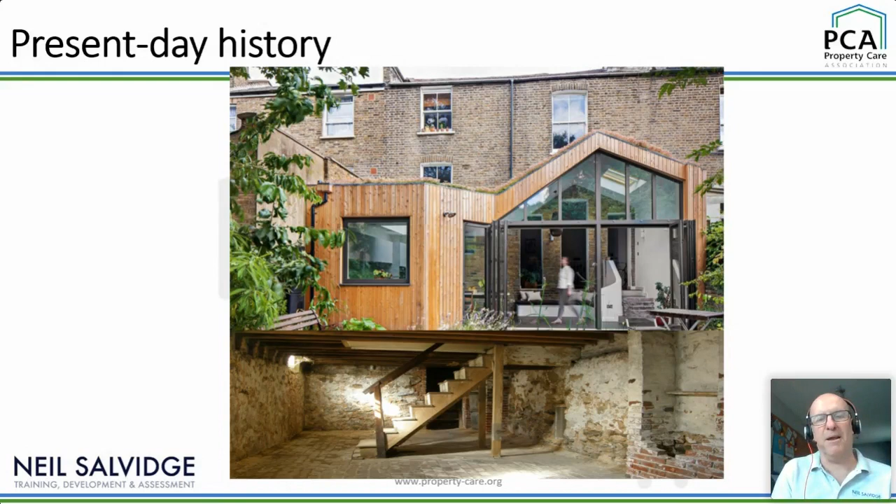So I'd like to close with a final quote. Henry Ford: "The only thing worse than training your employees and having them leave is not training them and having them stay." I know we're in a very difficult situation at the moment with the current climate. And I think it's holding firm on good companies looking after everybody, but also developing and nurturing those skills that you've got within your sectors to work better, work more efficiently, and reputations are being built.

This industry's moved a long way in 10 years since the NVQs have come around, and it's positive. I don't get so many horror pictures sent to me now, which is nice, but I'm sure they still go on, but they're getting fewer and fewer. So hopefully that gives you an insight into the world of ground gas protection.